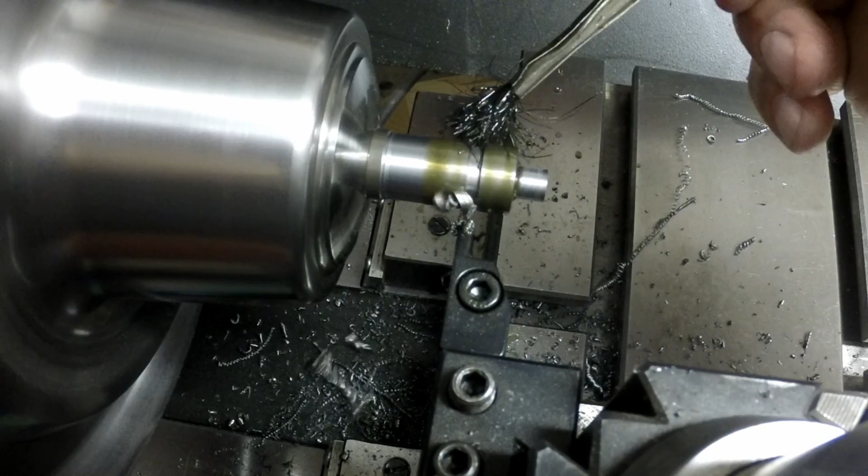I know it's been a while, probably a couple months, since I've posted a video. We were in the process of moving. We had a buyer for our house, everything was going good. Got everything packed up, ready to go, and the buyer pulled out. When they pulled out, we lost our contract on the house we were buying, and we haven't had any other offers since. So we've decided to hold off on moving, which is good for the wallet, but not so good for the shop because everything was all packed up, ready to go.

So I've had the last couple months, I've been slowly unpacking everything, getting everything set back up, and getting caught up on projects. I have been making stuff, it's just been really slow with the move and everything else, and also my shoulder's still not 100%. Probably will never be 100%, but I've had to take things a little bit slower than normal. But I'm finally caught back up enough to where I feel comfortable making videos again.

So this video is going to be a mount for a vehicle. It's an antenna mount that I'm prototyping for an Army unit, one of the local National Guard units here in California, for mounting an antenna onto their vehicles.

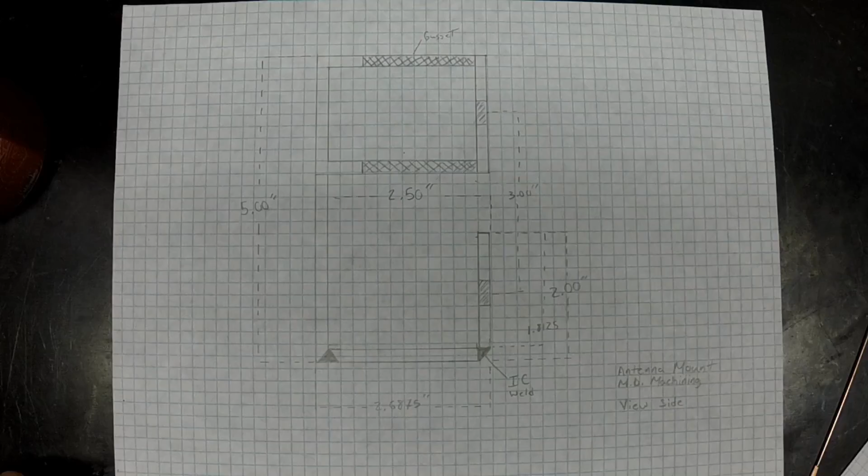So I'm going to flip the camera around, show you guys the print that I drew up, and we'll get started on the project. Alright, so here's the side view of the mount.

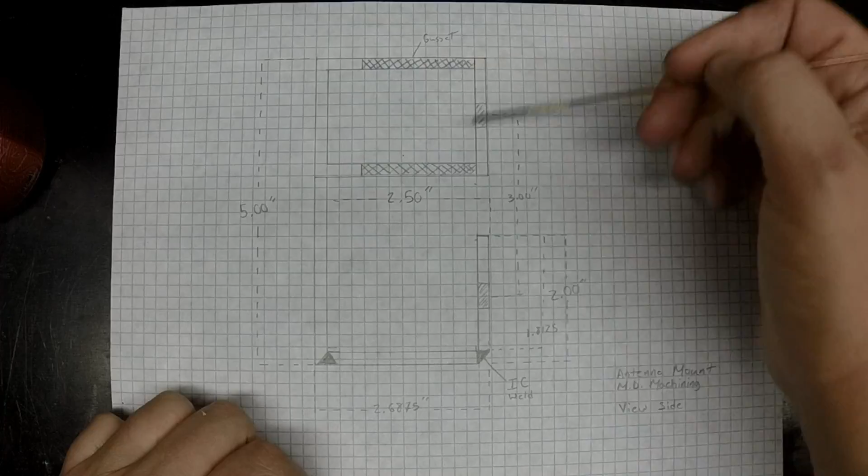This is going to be a solid section here, and then this piece comes out, and we've got two gussets in the corners here on both sides. The bottom comes around and kind of creates a C shape here, so the bolt's going to be mounted underneath, and then the mount for the antenna is going to, the circle hole's going to be right here.

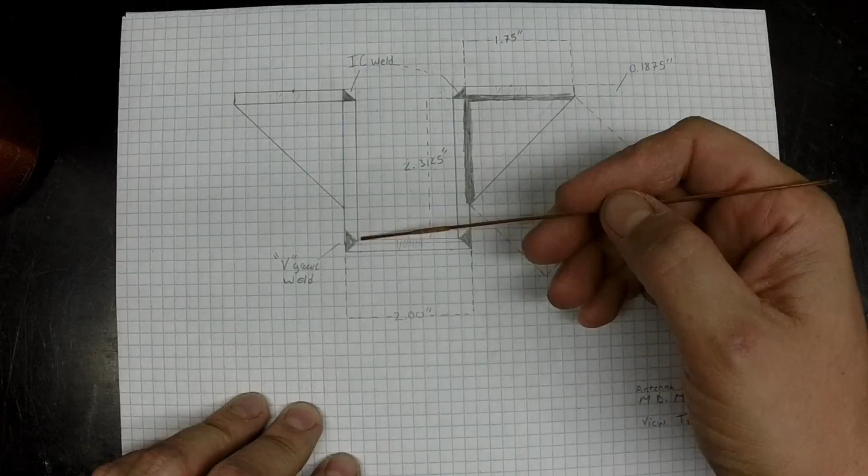Here's a top-down view, so it's going to be, the inside edge here has to be at least 2.5 inches off this bottom edge. So I've got all those shapes measured out.

This is the top of the mount here, and the gussets for the corners. And then the front view looking directly at the mount.

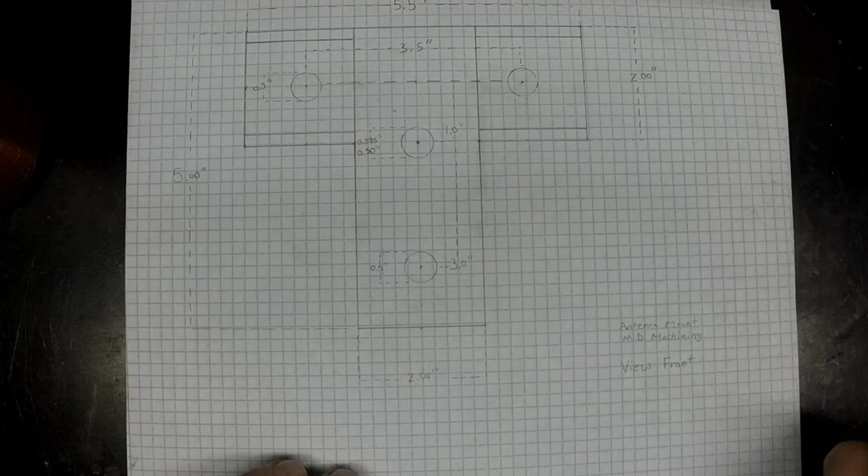You've got 3 mounting holes to mount the bracket to the vehicle. And then this hole here is for the antenna itself.

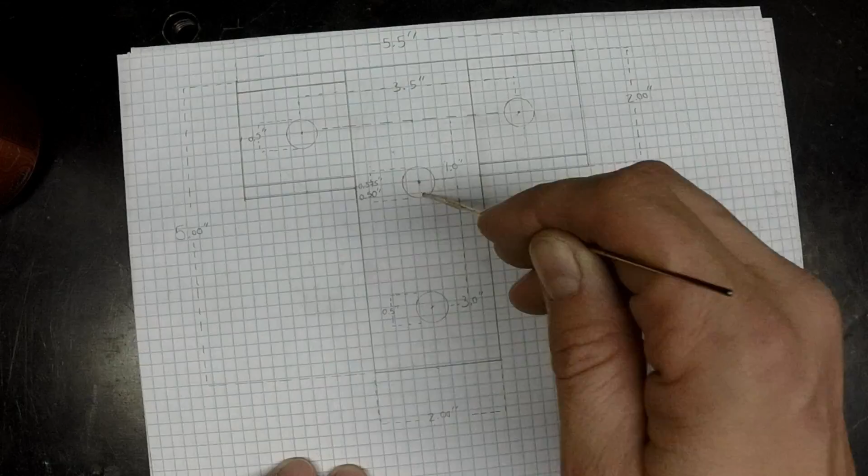So I have to build 2 of these. One, this hole's 1/2 inch. The other one, this hole's 3/8 of an inch. Everything else is exactly the same. It's just one hole is different sized on the 2 different brackets.

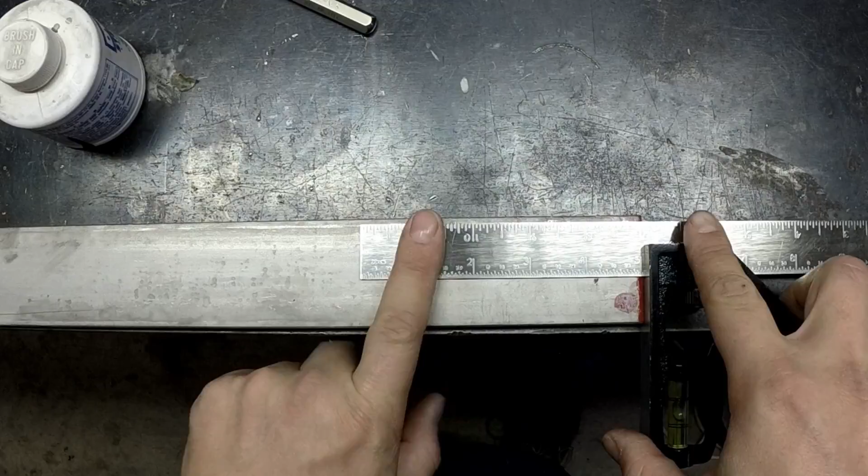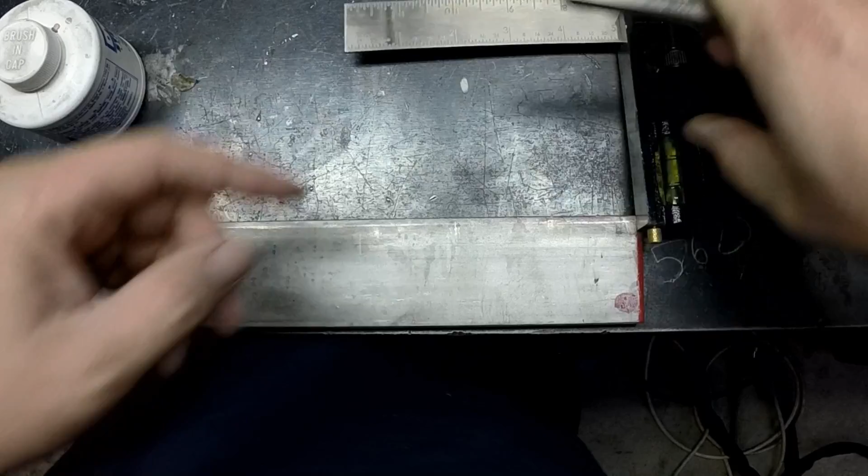Alright, so we're over here at the welding table. I got everything clamped up here. I'm going to just mark a hasty line here just to get kind of figure out where I need to put the Dykem at. I'm using my awesome Randy Richards scribe.

So the first piece needs to be exactly 5 inches long. What I'm going to do here is I have 2 pieces of 304 clamped together. I'm going to leave them clamped together, mark, cut. That way, since I'm making 2 mounts, every piece I cut I'll automatically have 2. Some pieces I'll need 4 for the total build. So when it gets to that, I'm going to cut a piece longer than I need, so that I can cut them in half again and get my 4 total that way. Makes it a little bit easier, I think, for time wise.

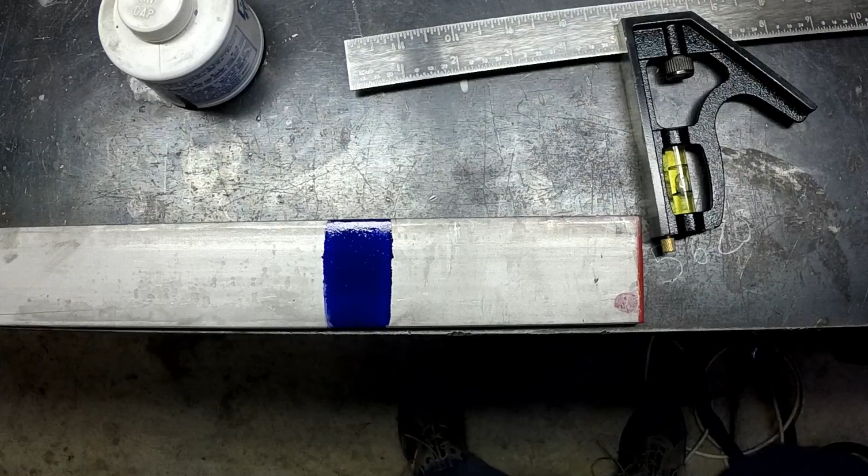Get this Dykem to dry a little quick. There we go. Now I'm scribing this line about 1/16 long. And of course my air compressor turns on right in the middle of me talking, which is always helpful and awesome.

So we've got our first line, and this section is the 5 inch, so I'm going to mark here, that way I know I'm going to be on, and then I'll get this taken off and over to the bandsaw, and I'll bring you guys back once I get it set up.

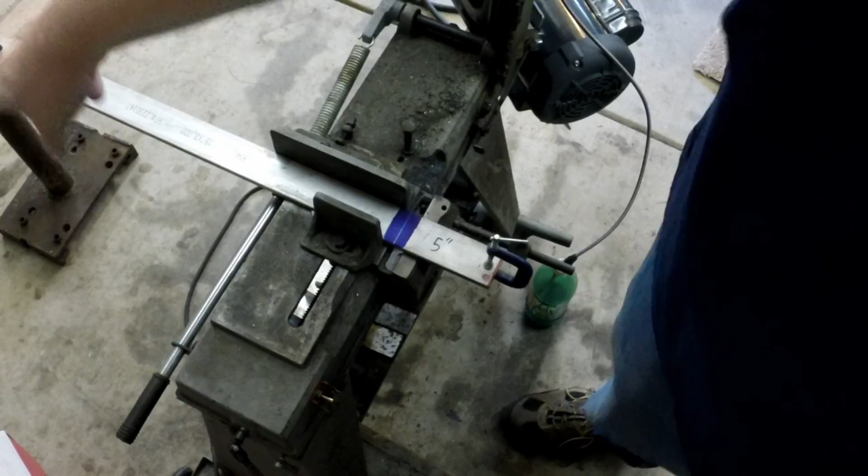Alright, so I got everything set up on the bandsaw here. I've got a base right there to support the length of the steel. I got the two pieces clamped together in the front so that when I cut it off, they stay together. I've got a brand new motor on this saw.

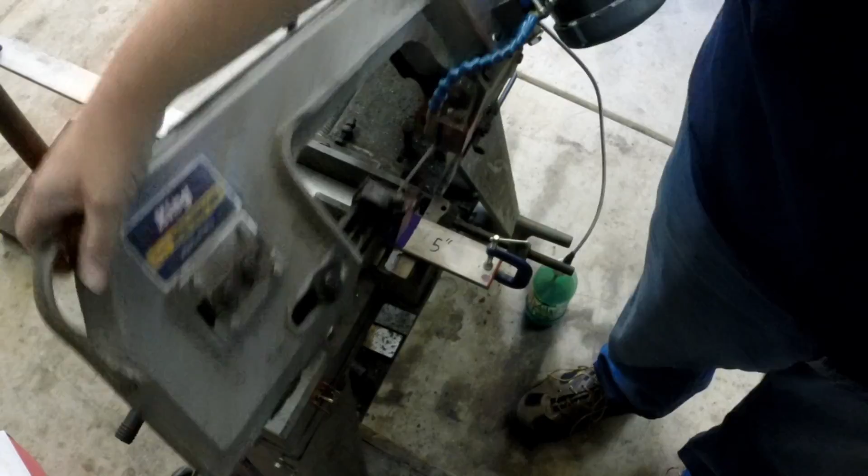I still have yet to build the belt cover. Got a little leak here. So I have to be really careful when I'm using it because I don't have a belt cover on there. But I got my little cool mist unit set up here, and I guess all that's left is cutting it.

Get this set up where I want it.

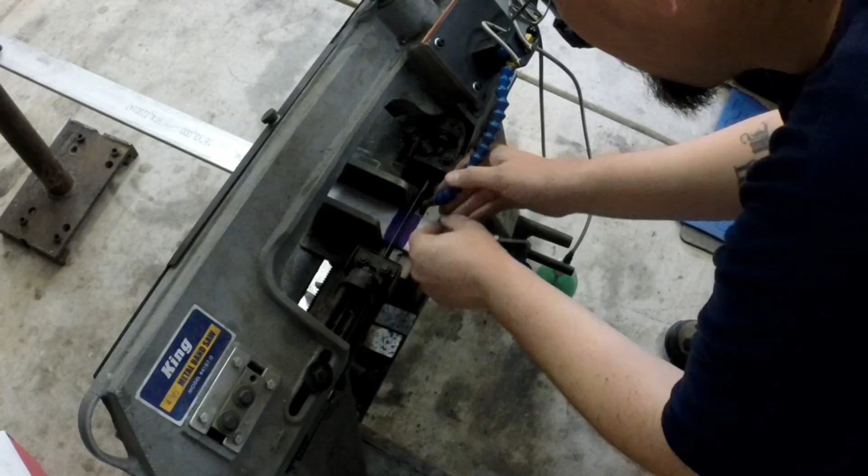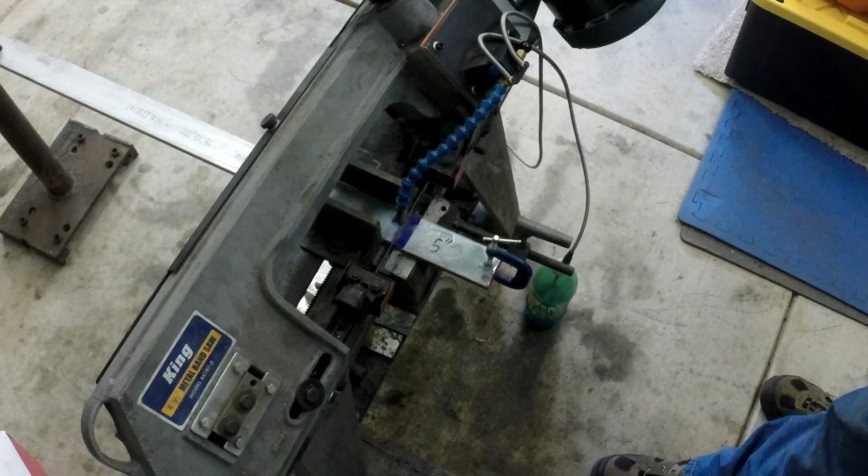Well, here's the problem. I chewed up this gear. You can see it's got plenty of oil in there. When I did all the other work on this, I pulled this apart and cleaned out all the abrasive crap that was in there. Checked all the seals, built a new cover so it wouldn't let any more oil out. And it is toast. This spins and doesn't do anything to this.

So it looks like this video turned into a new tool purchase. Alright, so the new bandsaw is here. The old one, I didn't even really put a whole lot of effort into trying to find the replacement parts because, to be honest, I'm tired of fixing it.

So I got this one. This is granted not the best in the world. It's a Harbor Freight model, but now that I've gotten to use it a little bit, I'm fairly impressed with the quality on it. So far everything seems to be pretty good. The blade was adjusted pretty good from the factory. It's got a built-in coolant system, hydraulic controlled descent, and everything is working great.

So I finished cutting that first piece before I remembered to grab the camera, and I'm getting ready to pull the bar out, scribe the next line, and cut the next set of pieces out. So I'm going to get the camera set up somewhere, figure out how I can do it on this new bandsaw, and get going. Alright, I'm going to try this setup like this.

I'm not sure exactly how it's going to work because I have the camera mounted to the actual bandsaw. I think it'll be solid enough, but we'll see how it goes.

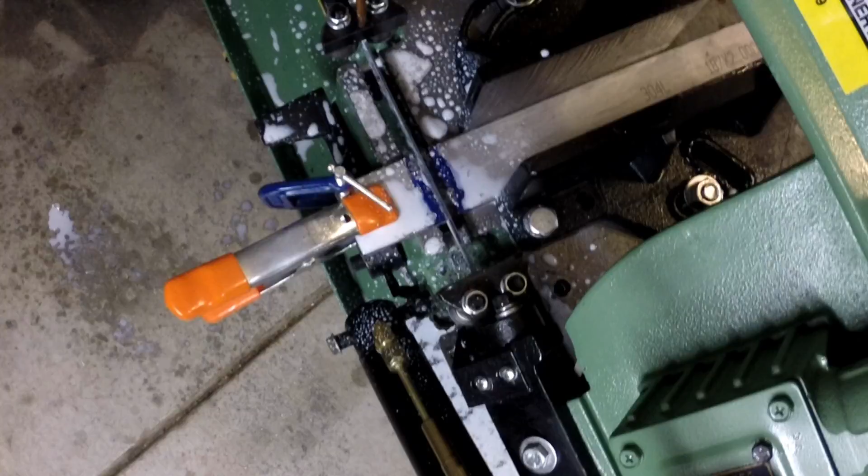It seems to kind of stutter there at the last little bit, but it's cutting very nicely so far.

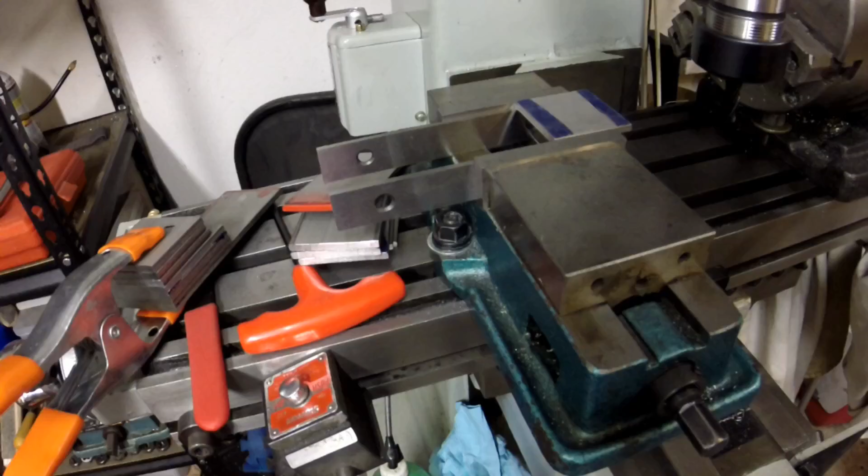Alright, so we got all the pieces cut. I've got two stacks here. What I'm going to do is take all of them and just make a skim cut on one edge to true it up so it's square to the sides. Once I get them all squared, I'll stand them upright, all the ones that are the same size, so I can stack them together, take a cut, measure, and then take the final cut.

The accuracy on this is not superbly important. It just has to be within probably 30 thousandths, which would be plenty tolerance for what it's being used for. So I'm going to get this the rest of the way set up. I just threw it in here last night. These parallels are still loose, so I'll get it clamped down, turn the camera on, and we'll start taking our cuts on this.

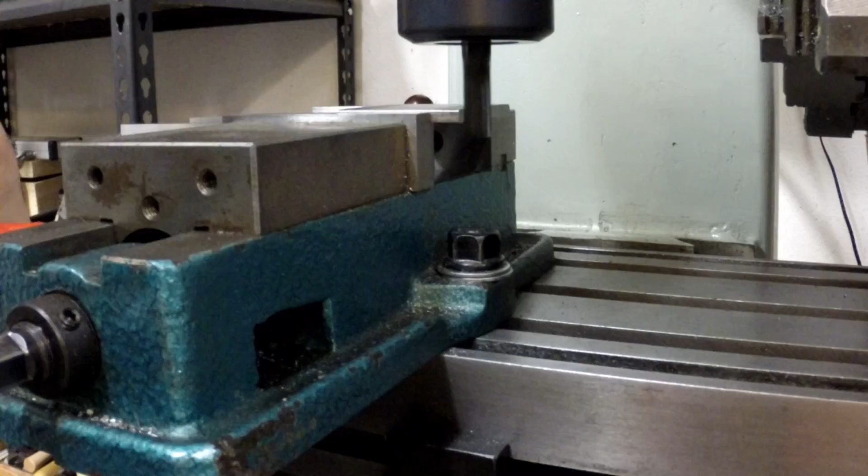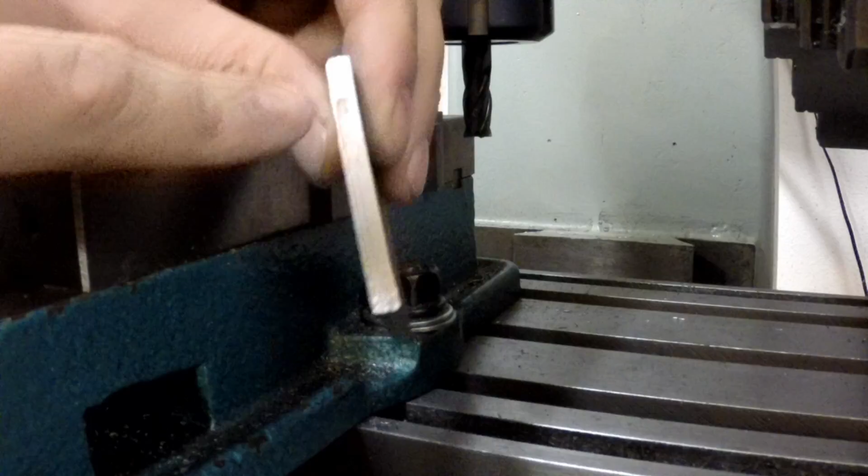And that's all I'm doing is just taking a skim cut. That cleaned up, I don't know how well you can see. There's just one tiny little spot here that didn't clean up, but like I said, for what this is, not really worried about that.

Alright, I've got everything set up. These are all sitting flush. This is the saw cut side here, and it didn't do too bad. This front one's a little bit shorter than the back ones, but I think it'll still clean up alright since they're all oversized.

I'm using a half inch, 2-flute solid carbide end mill that I got from Dennis Nolan from Niagara Cutters, and I am running at, if I can get over here to see, 1,000 RPM. So we'll see how this goes.

I'm going to feed up with the knee until it touches, zero it out, and make a pass. Okay, so we're touched off there. I'm going to take 20 for my first pass. Let's see if that is enough to clean up both sides so that I can get a good measurement.